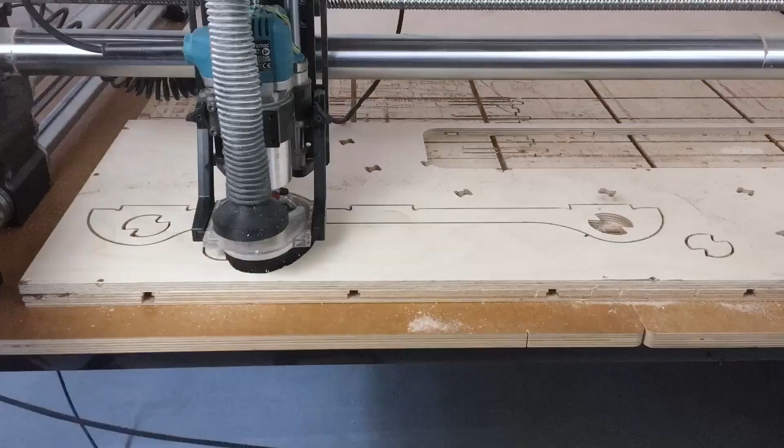Last week we built a material storage unit for our plywood scraps, and the storage stand was quite full. That means we have to start putting the wood to good use. So today we will build a simple bed table using the plywood from the material storage stand and test out a new type of joint that we haven't used yet.

We have this bed table design that we made a while ago, but we won't be using it today. Been there, done that. Instead, I decided to improve the old design and try a CNC joint that allows you to rotate the components at a set angle.

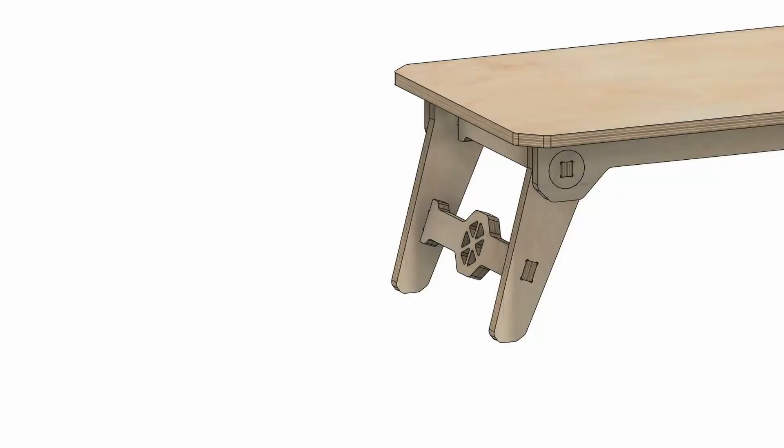So we replaced the 6 leg components with one simple shape component and made the hole at the table side component a little larger. The idea for this joint is quite simple.

We have the leg component that needs to rotate no more than 115 degrees from shut to open. I added small triangular stoppers in the joint holes. It will allow us to fold the legs closed for storing the table and fold them open when using it.

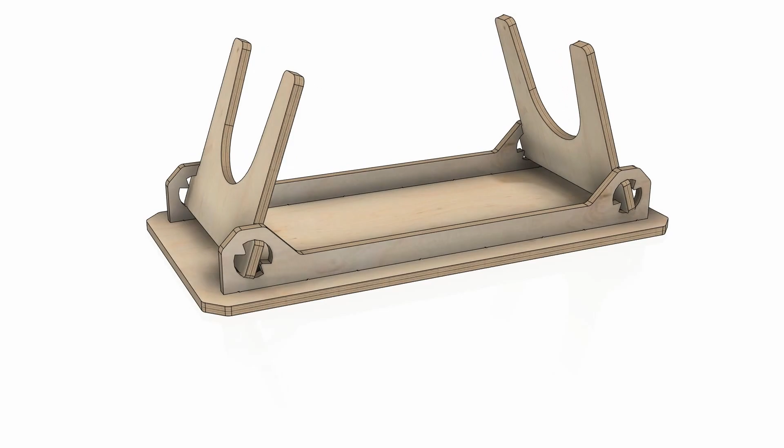When the design was done, it was time to take a couple of offcuts from the storage unit and cut all of the components. To optimize the material usage, I cut the components from 4 different pieces.

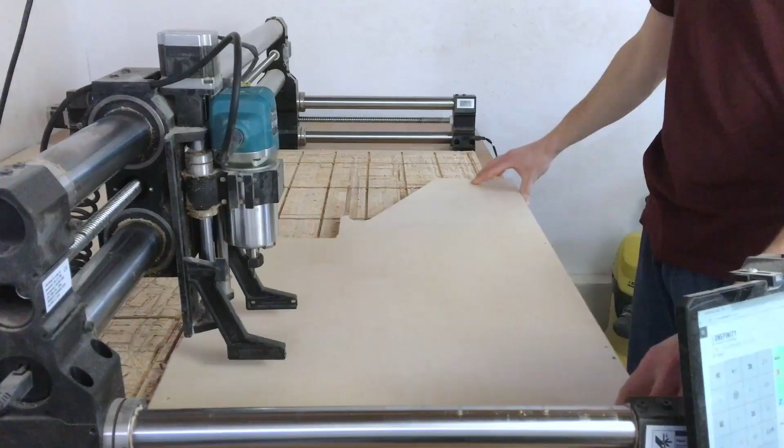First, I cut the tabletop. Then I made the side components, and after that I cut the leg components from 2 different plywood offcuts.

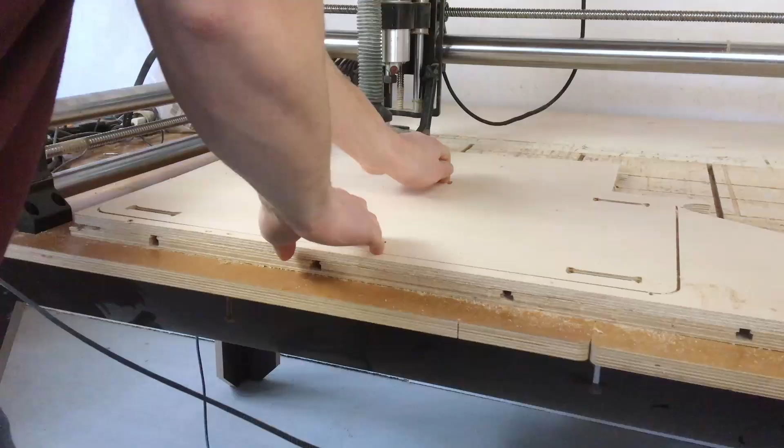Since I used 12mm plywood and a 3mm router bit, I didn't have to use support tabs. That meant that after the CNC operations I could easily remove the components from the CNC table.

Then I could trim the edges of each component on our router table and use the orbital sander to sand the larger surfaces. After, I took some sandpaper and made sure that all the component edges are nice and smooth.

Before applying the finish, I cleaned all the surfaces with a moist cloth. This way we can get rid of any dust on the components and ensure the best quality finish.

To finish the components I used a paint tray, a roller, a bunch of bamboo skewers as an improvised paint drying rack, and a water-based coating. So I stirred the lacquer, poured it into the paint tray and went to work.

First I applied the finish at the edges of the tabletop and then I did one of the larger surfaces. After moving the tabletop to the bamboo skewers to dry, I applied the finish to all other components.

When the parts felt dry enough, I flipped the components to the other side and applied the finish.

The next day I could assemble the bed table. This went quickly since all I had to do was put both of the leg components between the side parts and attach them to the tabletop. And voila, the table was done.